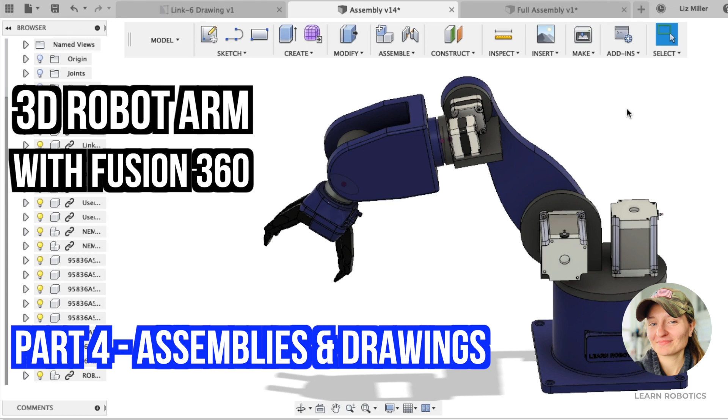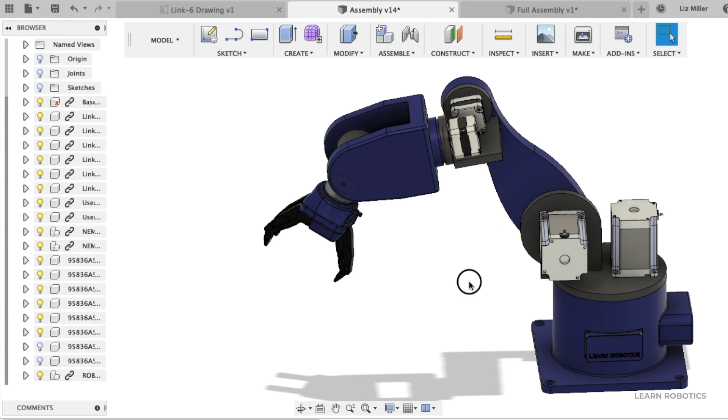So what you're looking at right now is the completed robot. We're going to put together the components using joints. We're going to add in some auxiliary components such as the NEMA 23 and NEMA 17 motors, and lastly we're going to add in a Robotiq gripper. This is their 3-finger gripper, and I think it looks really cool.

All right, so let's go ahead and create ourselves a new design. You go up to File, New Design, and this is what you should see once you've got yourself a clean slate to work with. Then you're going to go up to this data panel and open that up.

And in your Fusion 360 account, you're going to see all of the folders that you have available. So if you haven't created one of these yet, you can go to Library and create a new folder, then add all of your components into this folder before we get started. I already have mine in the robot arm folder.

I'm going to go find all of the components that we need to create our assembly, and I like to start from the bottom and work my way towards the end effector. So we'll go ahead and find the base, and this version of the base is what we'll be using in this tutorial. You'll right click on it, and you'll get this menu that opens up, and you'll select Insert into Current Design. All right, and there we have it.

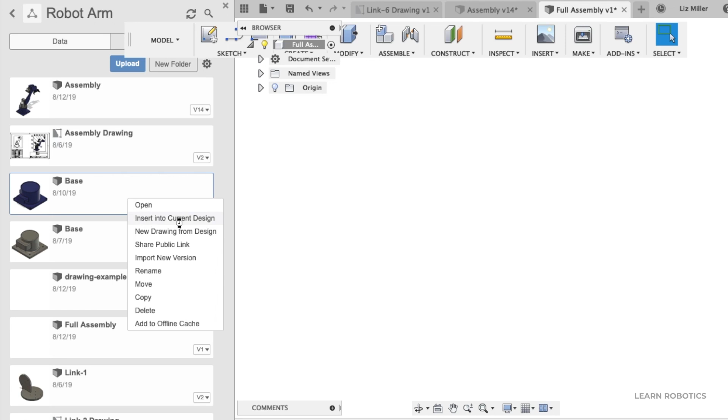And it allows you to kind of move this around in whatever direction you want, and that's useful for some of these later components. Maybe zoom out a little bit just so that you can see your workspace. Once you're good, you can just hit Enter, and that'll bring the component in, and you're ready to go.

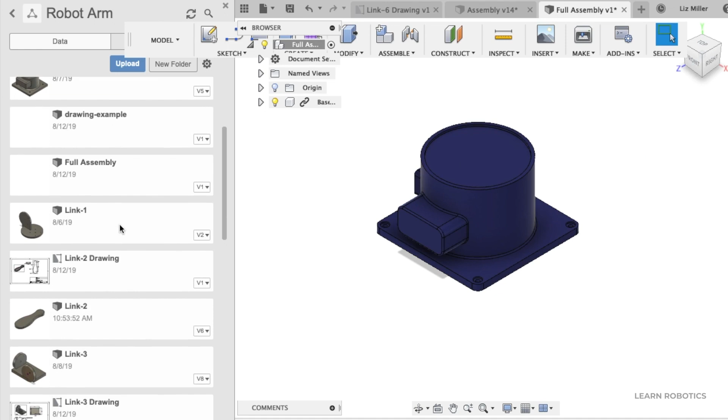We'll go ahead and repeat this for the next link. So go find link 1, right click, insert into current design. You'll see that's kind of overlapping this component, so what I like to do is just move it out of the way so that it's easier to access later. We'll just move it over here as well, and then you can go ahead and hit Enter.

So there's a couple of schools of thought when building assemblies. You can either go through and import every single part that you want to use inside of this model and then join all the components later, or you can start joining components as you import them in, and it really just depends on your preference. I kind of like how clean it looks when you just start joining components that go together as you import them, that way you don't have a bunch of components floating in space that you're going to have to try to either shut off or work around just to be able to join them.

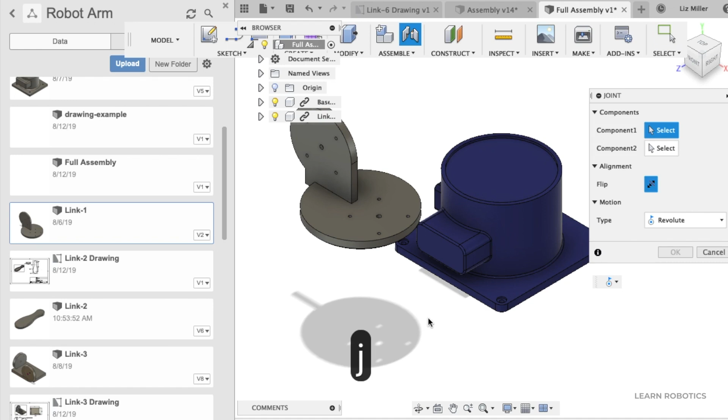So I'm going to go ahead and show you how to join 2 components, and then we'll continue assembling this robot in a minute. What you'll do is hit the J key on your computer, that's going to bring up the joint menu, and then you're going to need to select the first edge or face that you want to join.

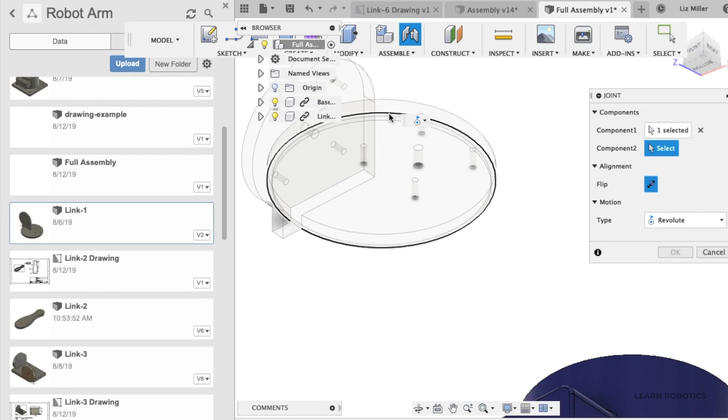Because we've got this base here and this component here, link 1, we're going to want to join the edge underneath this lip to the top of the base. So we'll go ahead and select this outer circle, and then we're going to go ahead and select this outer circle. You'll see that it snaps right over, and that looks pretty good.

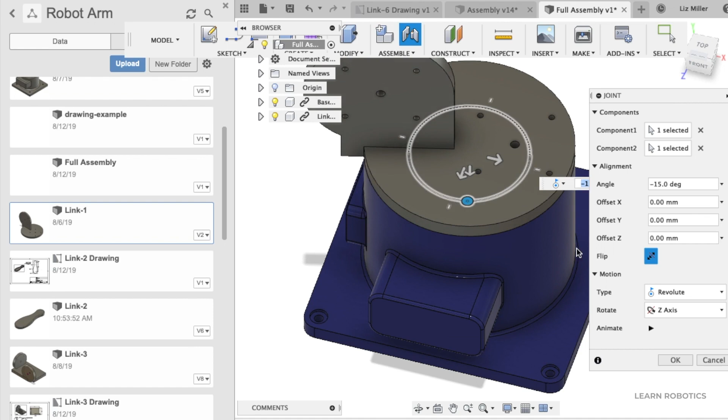Some of the cool options about the joints that you can do in Fusion 360 - they give you motion types. So if you want to simulate how this would actually work in real life, you can do that by changing the motion type. You can play around with a bunch of other options, but for this one we're going to leave it at Revolute. Once that looks good, you can hit OK, and now you've got these 2 components joined together.

So go ahead and pause this video, import the remaining components, and use joints to connect them together.

All right, we're back. And as you can see, we've got the robot fully assembled.

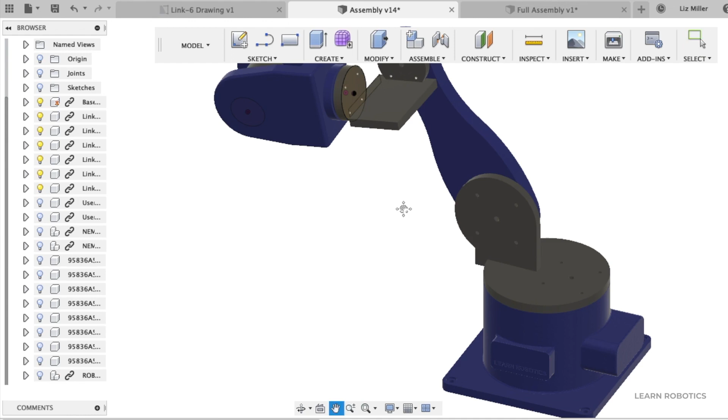The next step is to import some auxiliary components, such as the NEMA 23 motors and NEMA 17 motors. Go to Upload, find the directory where you've saved your step files. I've got one here for this NEMA 23 motor, then hit Open, and click Upload to add it to your project file.

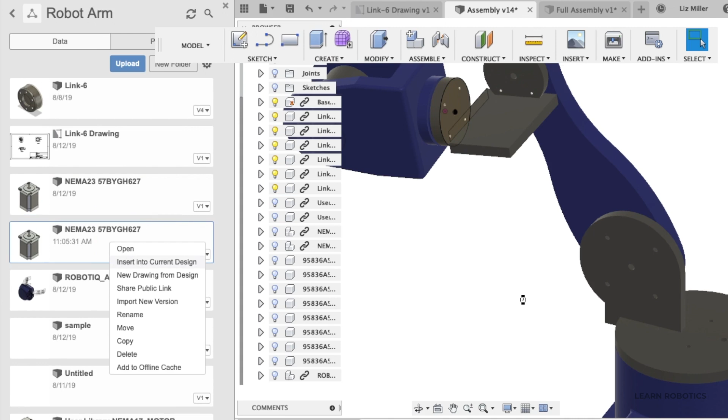Once it's inside the project file, right click on it. We'll find that NEMA 23 - this is the one - and insert it into the current design. You'll see it adds it in as another component.

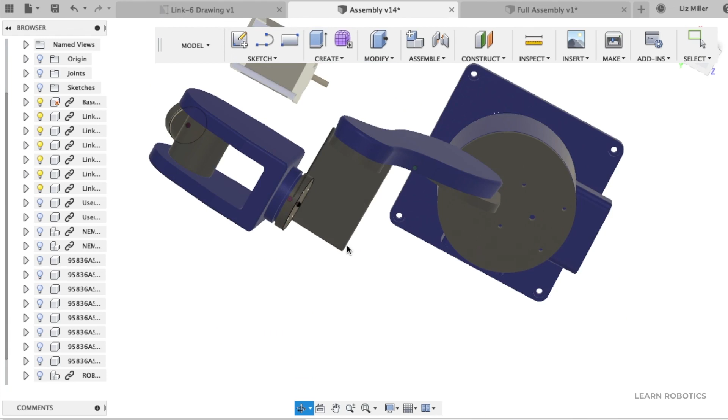Close out of this data panel to give ourselves more room, and hit enter to get it onto the workspace. Now we can use joints to line this up. The NEMA 23 motors go on the base motor mount, and the NEMA 17 motors go towards the end effector on this motor mount. So now open up the joint menu and align the components together.

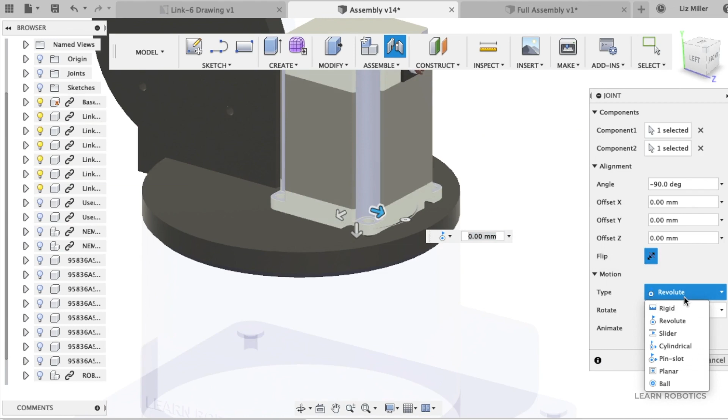That looks pretty good. Now we want the motor to be locked in place, so that's going to be rigid. We can take a look at how this lines up, and that actually looks pretty darn good. Once you're happy with that, hit enter, press OK, and now we have the motor on here.

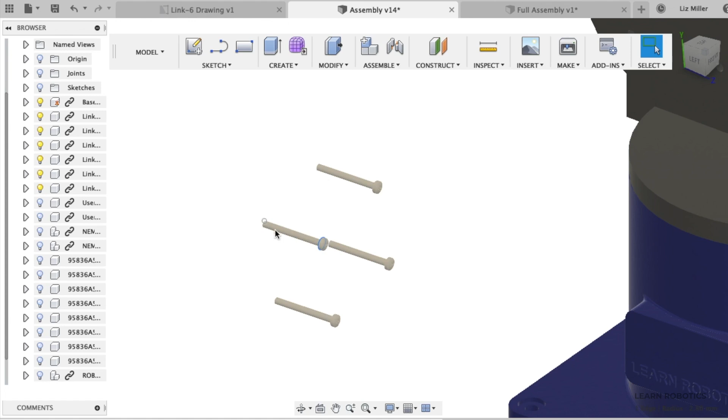You'll notice this motor actually came with some fasteners, so you won't need to find the McMaster Carr library to move these. It can be kind of challenging moving these little imported components if they're not already a group, but this one looks like it's fine as is.

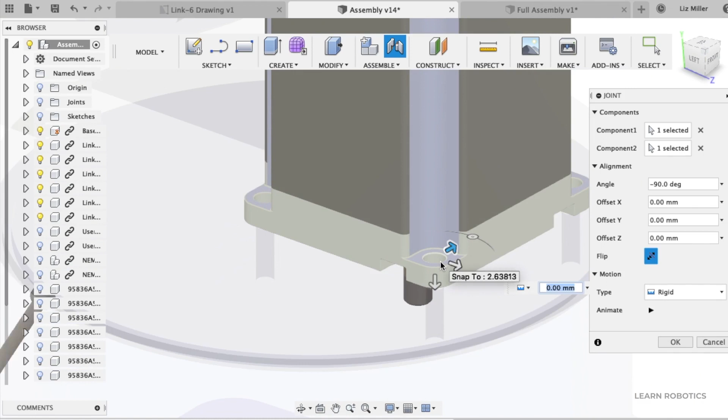We'll capture the position and find this inside circle. Let's zoom out just a little bit. We'll select the inside circle here, and that'll be snapped in and rigid. That looks pretty good.

You'll go ahead and repeat this process for the remaining screws for this motor, and then import another NEMA 23 motor and attach it to this motor mount.

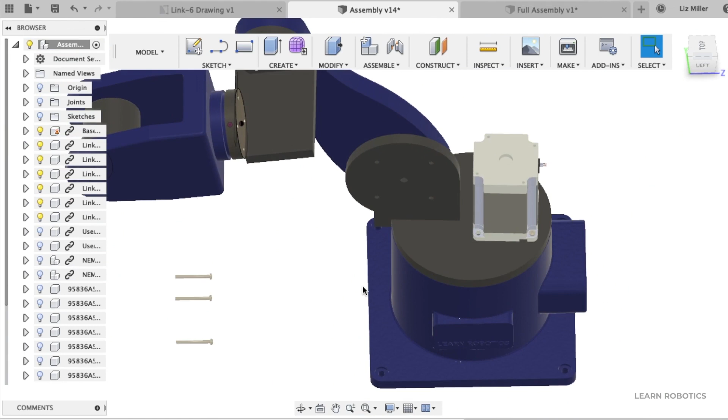I'm going to go ahead and work through this right now. Feel free to watch me as I'm doing this just to get some understanding of the methods that I use. I'll also talk to you about some of the tools I'm using when designing.

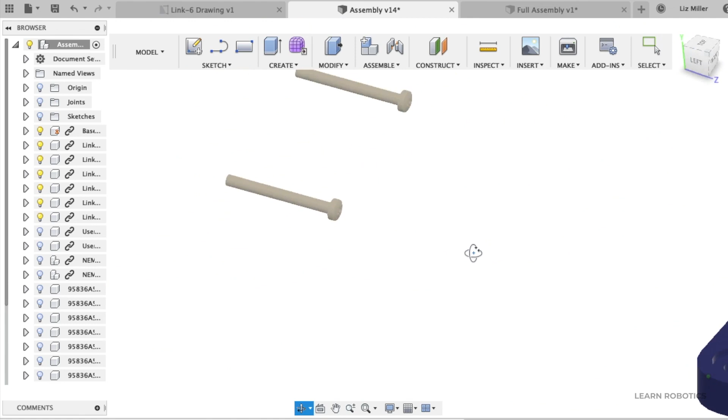You'll notice I kind of play around with my view, and there's a cool little shortcut for this. If you hit the shift key and the middle mouse scroll wheel, you can orbit, which is nice because seeing certain parts of your component can be challenging, especially when you want to join something together. If you accidentally select the wrong thing, you could be connecting parts that don't make sense. So that's a nice little trick.

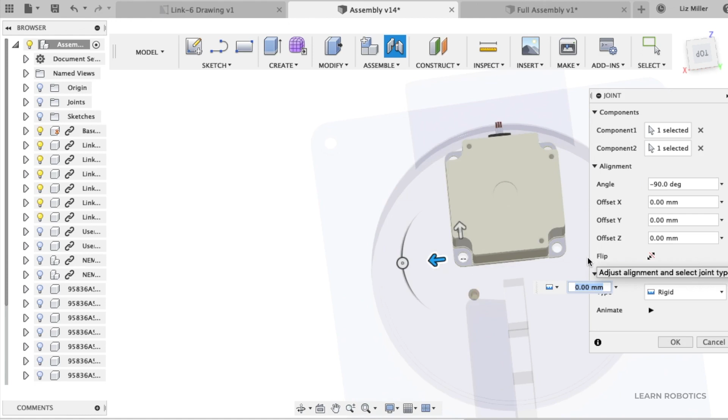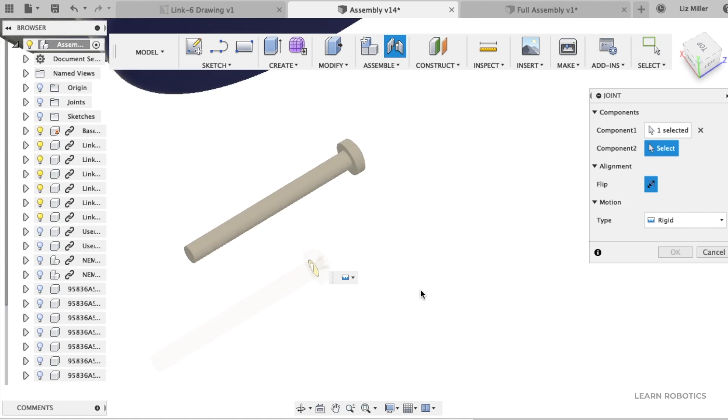There are a ton of different specialty CAD modeling peripherals, but I don't have a special mouse or anything - this is literally just a wireless mouse plugged in USB, pretty standard. If you're interested, I can leave a link in the description below. The reality is you're going to want to use something other than a trackpad. I'm running this on a Mac right now, so I've got a really good trackpad, but it's just not as convenient as having a mouse - your workflow is a lot faster if you use one.

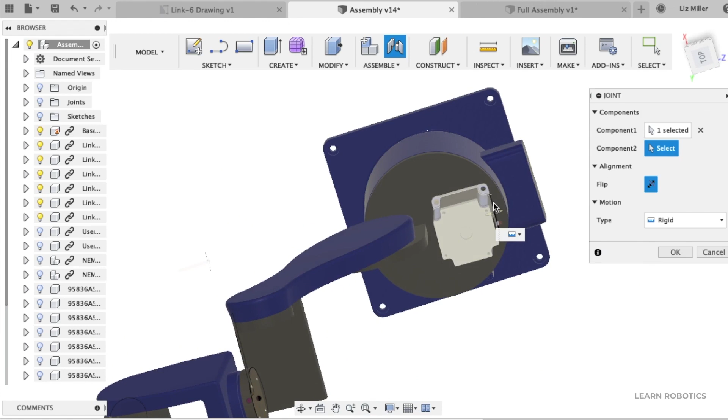So you can see, just repeating this process for the remaining screws. I love using the keyboard to bring up some of these menus because it's so much faster than finding them in the toolbar, especially if you know their code. And if you don't know their code, you can use the letter S to bring up a search menu.

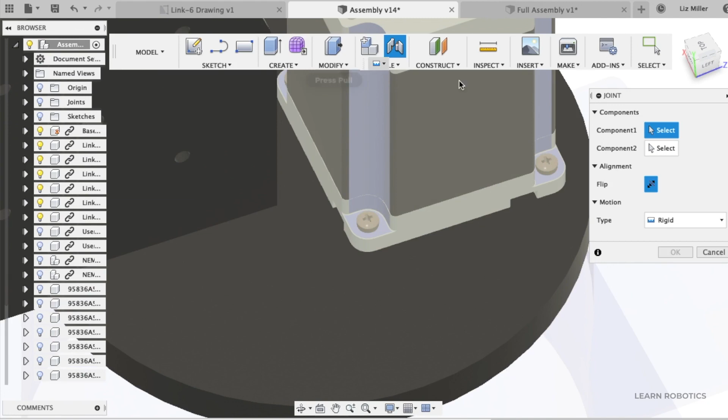If you're trying to find something, bring up S and it brings up the model shortcuts. You can type in joint, and there it is. You don't have to go looking through layers of different menus trying to figure out where it's stored. All you need is to search for something, or remember the shortcut key on your keyboard. So that looks pretty good.

Now we just need to repeat this process with another NEMA 23 motor, and then we'll go ahead and import the NEMA 17 motors and add them to this drawing.

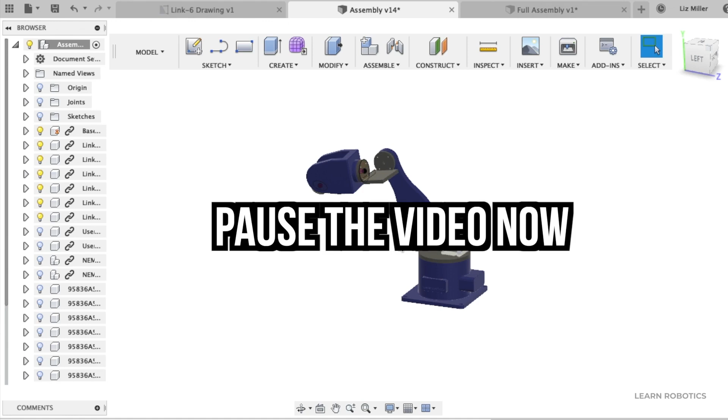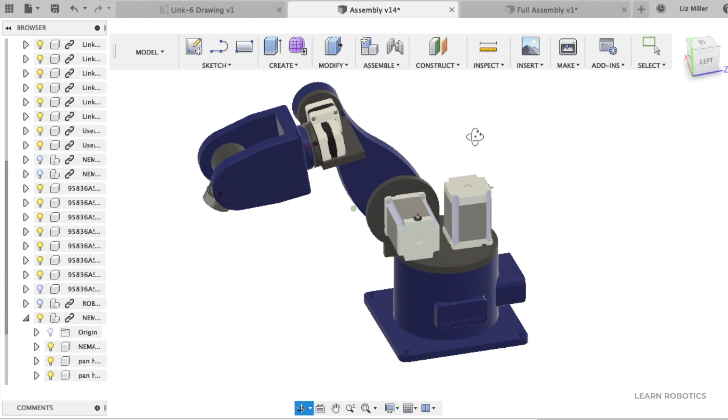All right, welcome back. Now we've got our motors mounted to both of the motor plates. We've got the NEMA 23 motors on the bottom, and NEMA 17 motors on the top. What we want to do now is bring in the end effector, which I've chosen to use the Robotiq 3-finger gripper, which is really, really cool.

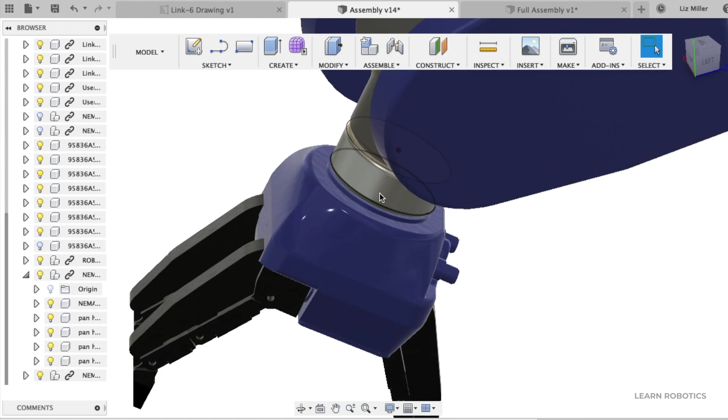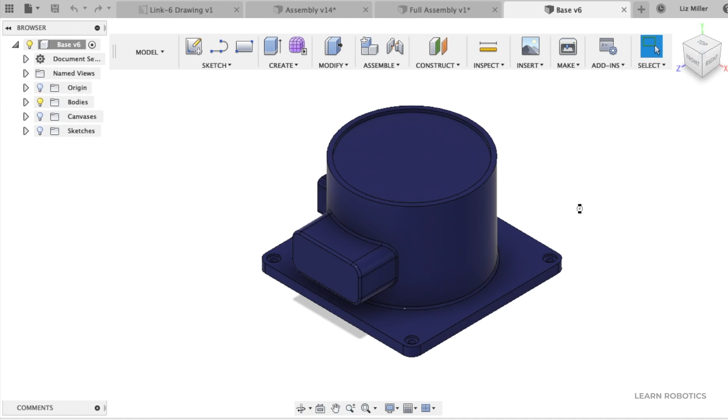I've chosen to do a little bit of a powder coat over the parts. So what you'll do is select the component you want to change, then go to Open—you can't change any features on a component in a full assembly, it just won't let you. So instead, open up the A menu, which is for appearance.

Let's say we want to print this in a white ABS. Go down to plastics, select the white ABS, drag and drop it over the top, and now your model is in white ABS. Just hit Save, Control S, or Command S if you're on a Mac.

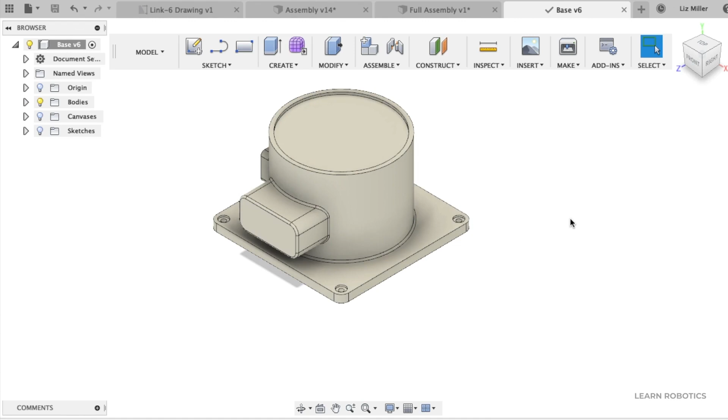When you go into your assembly, you'll notice it hasn't changed yet, but you'll see a little warning over the part. Just right click on it and select Get Latest. It'll go through, get the latest, and now your base is in that white ABS. That's just a little trick to make your models more realistic.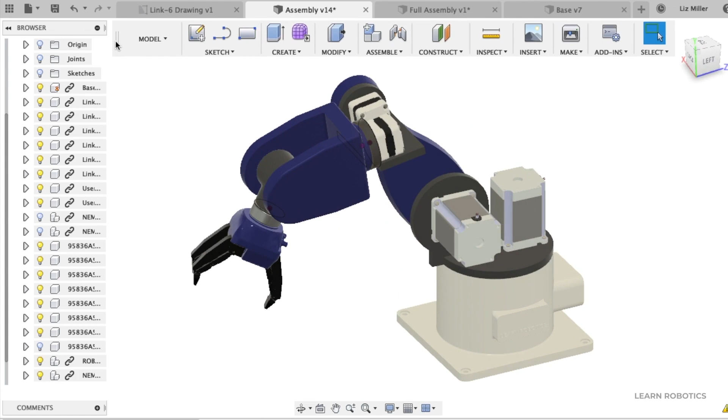I'm going to go and generate some drawings with it. One of the most coveted things about creating CAD models and drawings is the exploded view, and you can do that in Fusion. It's a little different than other platforms, but we're going to switch over to the animation workspace. You can see I've already started to take this model and make an exploded version of it.

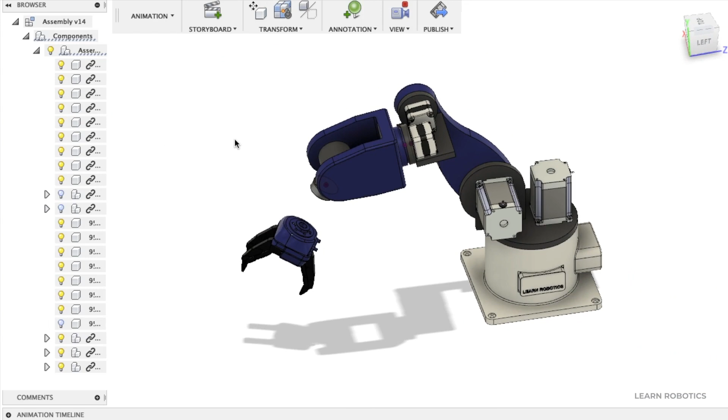You'll first need to create yourself a storyboard. I'm going to go ahead and create a clean one, and you can follow along with me. Once you have a storyboard, go down to this animation timeline, and instead of calling it storyboard, let's call it exploded view.

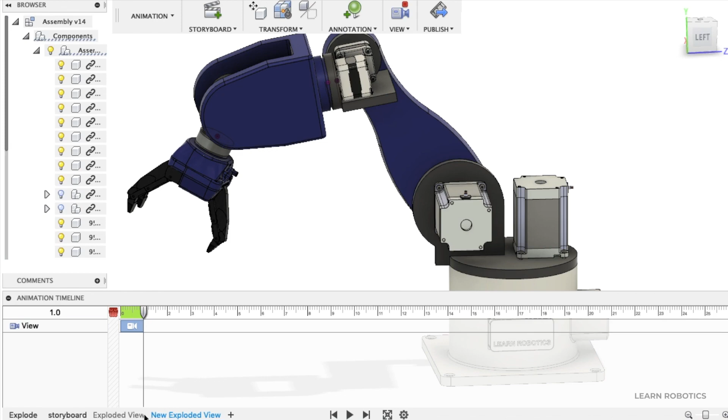I've just named my new exploded view because I've got quite a few different exploded views on here, and that's going to be important later as we select this animation in our drawing. So make sure you give it a meaningful name, then click the Transform Components button.

This is kind of the most tedious part of the whole process—you're going to have to select every single component and slightly move it around. I actually really enjoy using this browser for this, because sometimes if you try to select a component, it's not all grouped, and you end up moving pieces you don't want to touch.

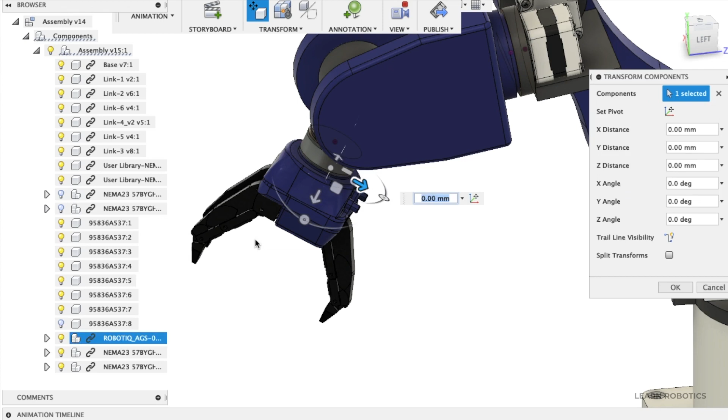So I'm going to click on this gripper—let me get rid of that—and then move it out a little bit, then hit Enter. I'm going to repeat this process for the remaining components.

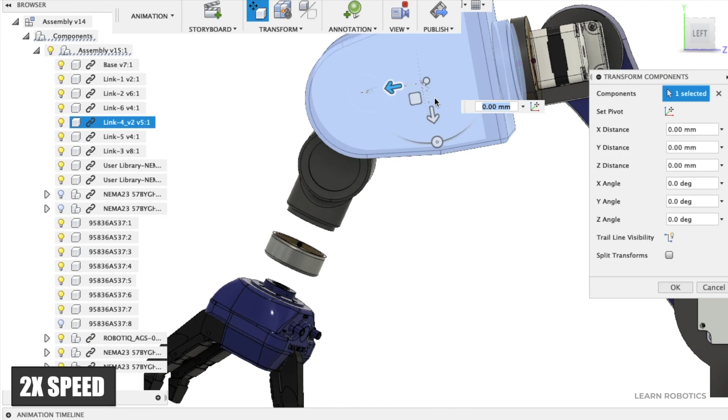I'm just going to move it out a little bit, and grab this one. I like to work backwards, from the end effector to the base, just because the base is what's stationary. If you start from the base, it's a little confusing where the robot is sitting, but if you start from the end effector, it looks more realistic.

So now we can grab this one, and I'm just going to move it up a little bit. This is really just personal preference—it doesn't really matter where you move it. If you spend some time and play around with it, you can get some pretty cool looking models.

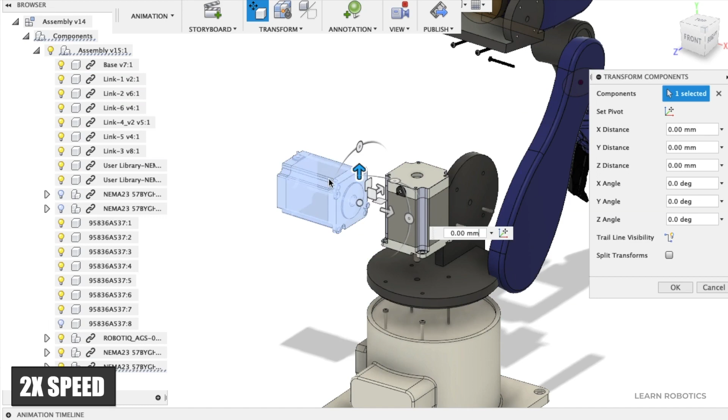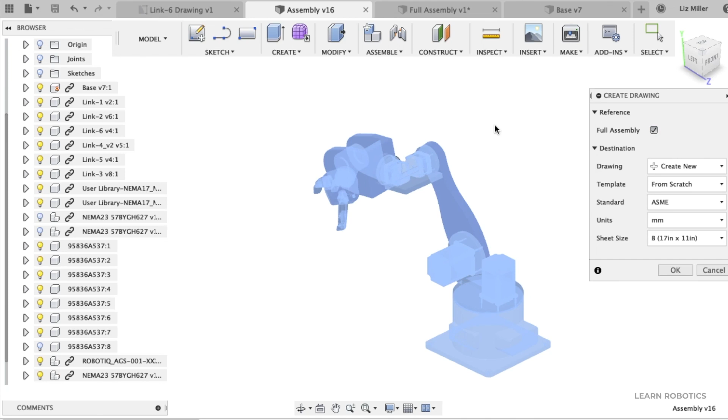That looks actually really good. So then what you can do is save this, go back to your modeling workspace, and then go up to File, New Drawing from Design. It's going to ask you what reference you want, which will be the full assembly, so I'm just going to leave that to default.

I've noticed this can take a little time to load, so just be patient with it. I'm going to bump this up just a little bit so it's a little bigger on the drawing, and you can play around with what view you want. I'm usually a huge fan of the home view. Then just click anywhere on the paper, hit OK, and it'll place the model.

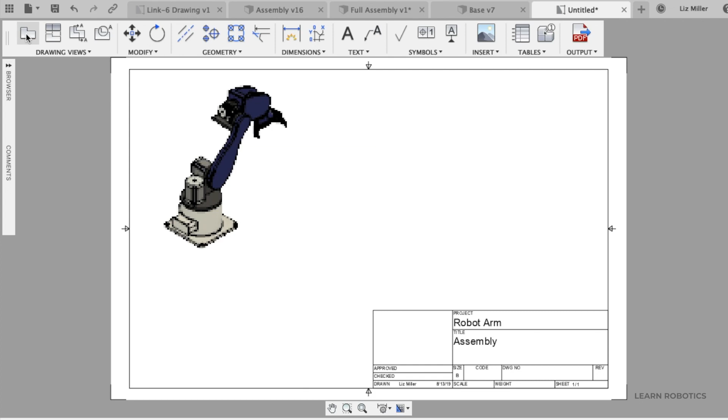The next thing you can do is bring in another model, and instead of placing it from the modeling workspace, we're going to place the model from our new exploded view workspace, which will get you all of those components blown out. I'm going to play with this - I think that looks pretty good for an exploded view. You want to make sure your scale is consistent for all of your models, because it can be confusing for people reading the drawing.

So then you'll just click and hit OK. Now you've got both the assembled view and the exploded view, which I think is really cool, because then you can add in a table. The table will generate a bill of materials - it'll tell you information about all of the parts needed to actually build this assembly.

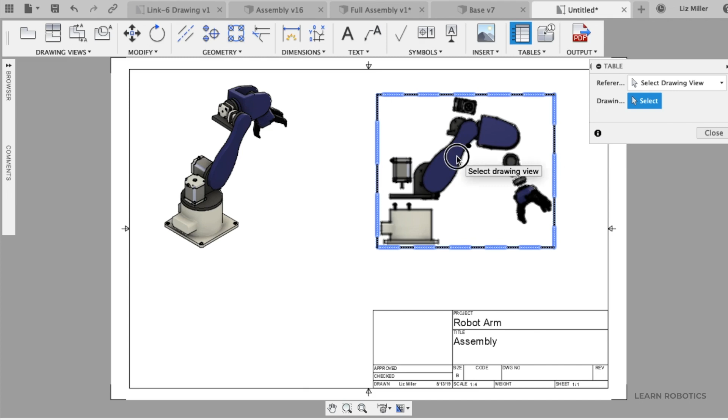Once the table window pops up, you're going to need to select a reference - basically, do you want this model to have the callouts, or do you want that one to have the callouts? I personally just like it on the exploded view, so I'm going to pick that one. Then this table is going to pop up, telling you to place it somewhere, and I tend to go down to this bottom left corner just because I think it looks neat.

I don't personally like the titles at the bottom, so I'll double click on this table and make the direction go down so the headers are on top. Because there's no part description, I'm just going to remove that from the table - there's really no need to have that in there. But as you can see, you have a lot of different options for what you can add to this table.

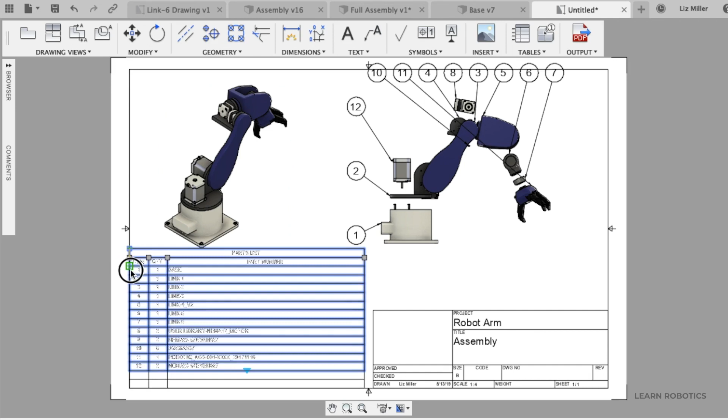It'll tell you the item number, the quantity, what the part number or model name is, and the material it's in. So if you didn't want to show material, you can just leave it like this, and that's pretty good. Then we can move this table out, and that looks good. We can adjust it down a little bit so it's nice and flush with the corner, and that looks pretty good.

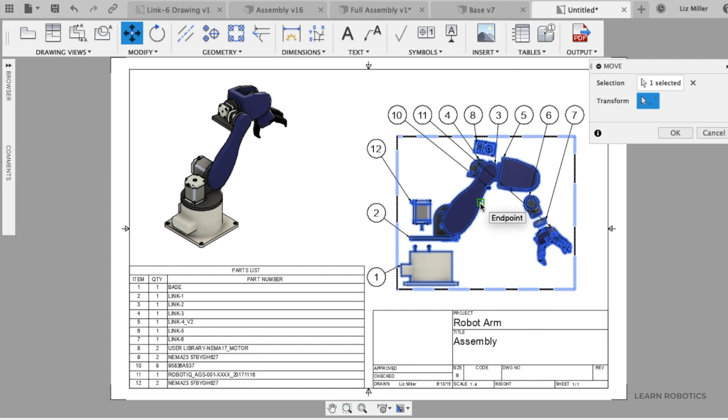So now you've got yourself a parts list or bill of materials, and a model. If you notice, this model is actually hanging over the edge, so to fix that, just type in M, select the point, and move this guy down. Let me try that one more time - just move it over and hit enter, and that looks pretty good.

So now you've basically generated a drawing from your assembly. If you want to print this out, you can use this to go ahead and start the manufacturing process.

One last thing I want to point out is this little title box down here. If you double click on it, you can edit all the information in here. So if you wanted to give it another title, a code, a drawing number, a revision number - if you wanted to change any of this information, you can do so right here.

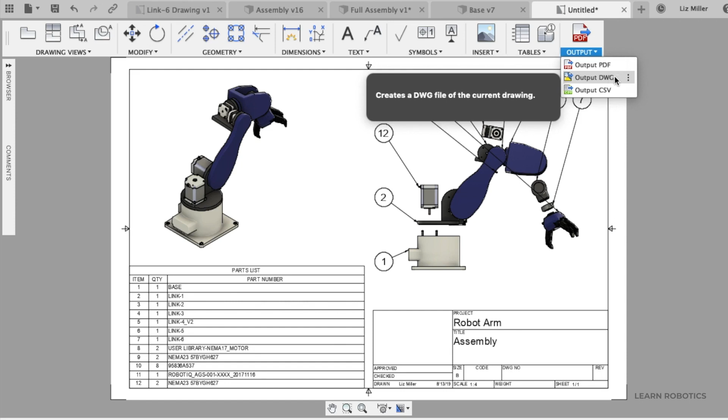And lastly, you can always output this as a PDF, a DWG file, or a CSV file. But in the next tutorial, we're going to look at taking all of these components and 3D printing all of the links that we drew, and then sourcing the motors, the fasteners, and potentially a gripper.

So that's how you create a drawing from Fusion 360. Stay tuned for the next tutorial where I share with you how to take all of these individual components and get them ready for 3D printing, as well as sourcing motors and the end effector.